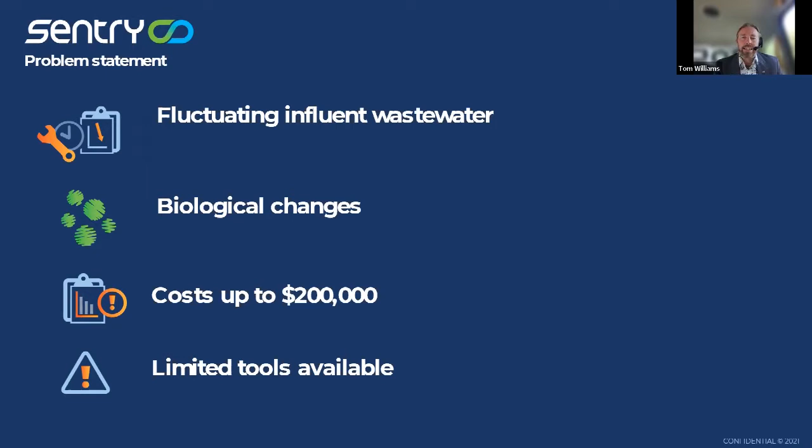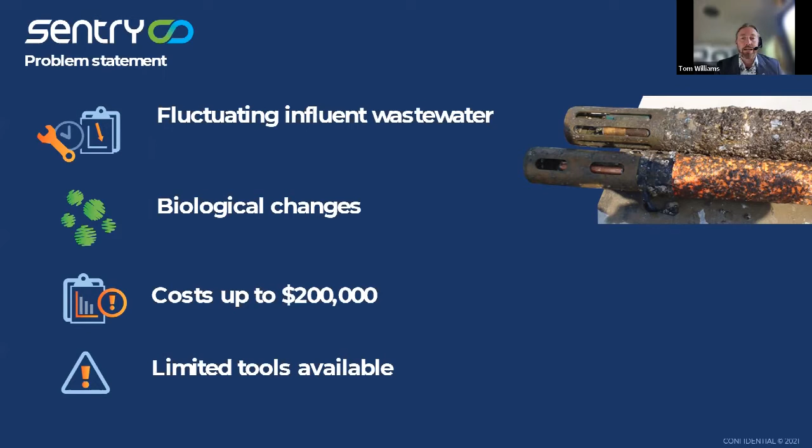So we had a problem statement. We all know this, we're all wastewater guys. You have fluctuating influent wastewater, you have the biological changes coming in, you never know what you're going to get coming down the pipe, and you need to know what's going on. If you're anything like me, you've seen probes covered in crap, which is no surprise - we're putting these probes in the crap, literally. But this is no good for our information, especially if this is an optical probe. Any optical probe that looks like this is not giving you a true reading. And the amount of time you're spending going out checking and maintaining these probes, you know they're not giving you accurate information.

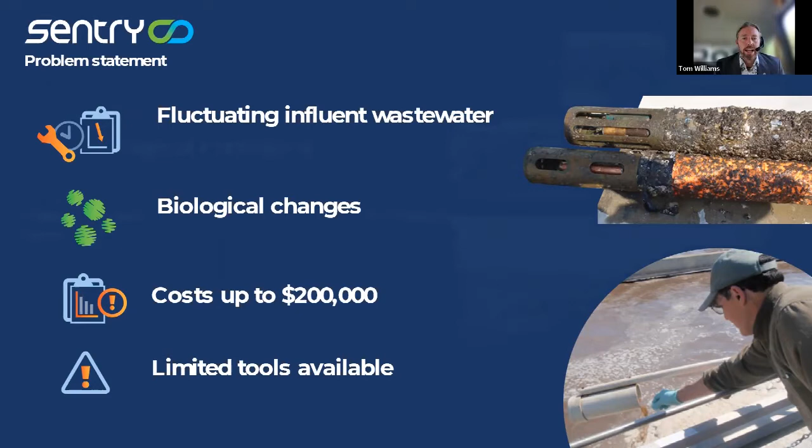So the very clever Dr. Patrick Kiely came up with a wonderful idea, and this was SENTRY. As we move forward - oh, there we go - that's what it looks like.

What's the tech? So this is what it is. Here on the right we have a probe, and on the left we have the box that this is connected to. In this box there is all kinds of communications. It can plug into your SCADA system, it can connect to your Ethernet, it also has a port for a phone card, a SIM card that can connect directly to a cloud.

On the end of that wire is this probe, and we have an anode and a cathode on either side of this probe, and in between we have a metal surface where our biology forms a biofilm across the surface. As that biofilm consumes carbon, it releases an electron, and we track that electron across the surface of that biofilm, and we come up with a signal - we call that MET, or carbon consumption rate - and that matches to the health of the biofilm.

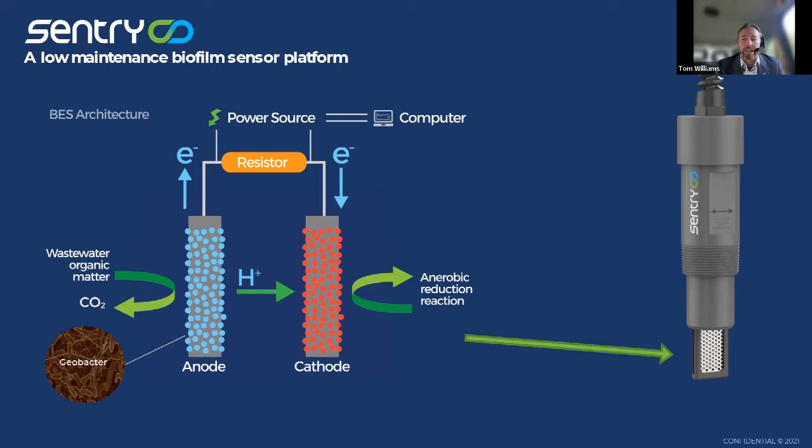And because we're encouraging a biofilm, we're encouraging deliberate fouling of this probe, and we're never getting any problems with the optical masking that you see with other probes.

As you can see, it's fairly easy to fit. Here on the left with a high flow, we've just got it strapped to a pole and dropped straight into the water, or maybe into an inlet tank to make sure it's fully submerged, or you can plumb it into a 1.5-inch line, or larger if need be, if you're looking at sludges or other types of liquors.

The box itself is NEMA 4X protected, and we're going backwards and forwards with the thing - it's NEMA 4X protected, plug and play, easy to use, and can connect to all your different communication devices. Now communications is always the big question with any probe, but we're happy to provide Modbus connection, Profibus, Wi-Fi, Ethernet, whichever suits you, and more likely 4 to 20 milliamp output into a SCADA system.

We usually provide 1 to 2 panels with 2 to 4 probes connected.

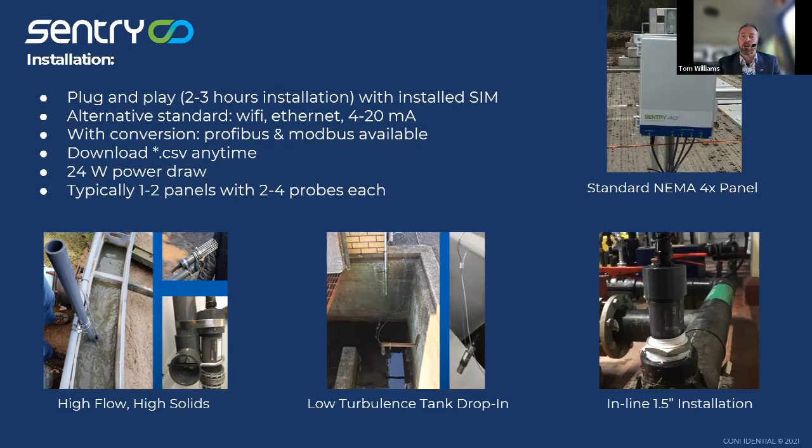Just keeping you on your toes, Tom. Just keeping them on my toes. Yeah, I'm liking this, it's good, it's like I never know what's going to come next. I'm going to be interested to see how the guys do this, introducing their setup.

So here are some of the locations that we're starting to use this probe, because a probe is only as good as the data it provides. As we say, with the optical setups, you can never rely on that data, but that data has to be useful, not just a random number generator.

So we started by looking at the inlet works with a primary clarifier to understand what's coming into a plant. And then we moved down the train, whether it be an aeration system, an anaerobic digester, whether it's some biological removal, phosphorus or nitrogen, or even we can go up the collection system into the network to try and judge maybe what industrial waste is coming down the pipe before you receive it.

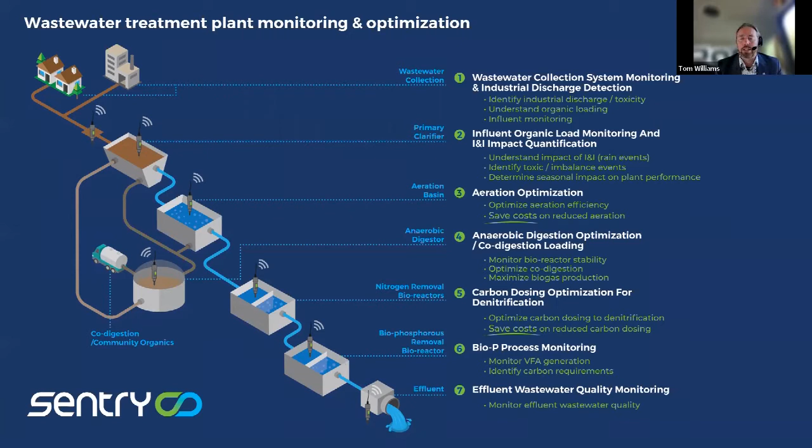And then the last point is the effluent, of course, and we want to see the best water quality we can. But really what we're trying to understand from our connections with you, and as you'll understand from the short introductions we're going to hear from the guys talking today, is what can we use this data for? When you know what's coming in, that's invaluable information. But how can you optimize treatment further down the line accordingly? How can you use that data?

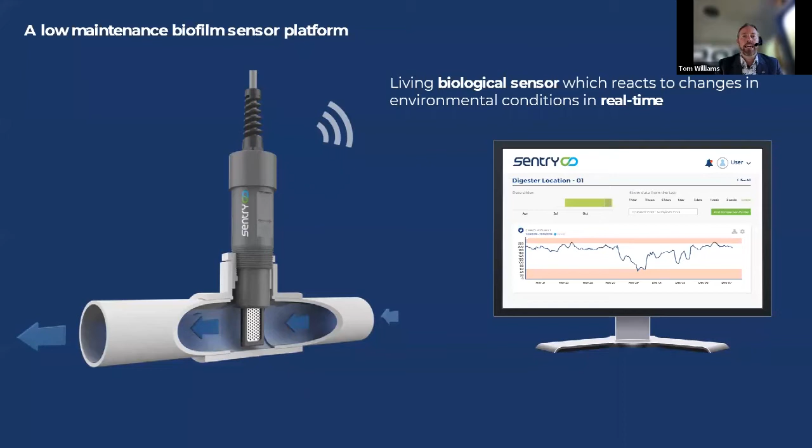And to help with that, we upload it onto our online platform where you can scan over time and compare different probes, and you have that instantaneous set of information for what's coming into your plant.

So far, in the last 3 years, we have managed to expand all across the world, and here's some of the locations where we have installations.

Across the United States, which many of you will be preparing for WEFTEC in the next couple of weeks, we have a number of installations. And of course, our global HQ is this tiny little island just in the middle here, Prince Edward Island in Eastern Canada. So it's a beautiful location to visit. Please come and see us, and hopefully we'll see you at WEFTEC.

Okay, so now we're going to look at applying it to plant optimization, and we're going to talk to some of our customers that we've been working with this year, and we're going to ask them to give a very brief and short introduction to what they were doing with the probe. And we have a couple of slides from them.

Most of the time, SENTRY is applied to these particular challenges: detecting organic loading and toxic shock at the inlet is where we're talking about, feed forward control, and generating pattern data on what's going on with the treatment works to help give that feed forward prediction to what's going on. However, these guys are going to tell you what they wanted to do and where they are.

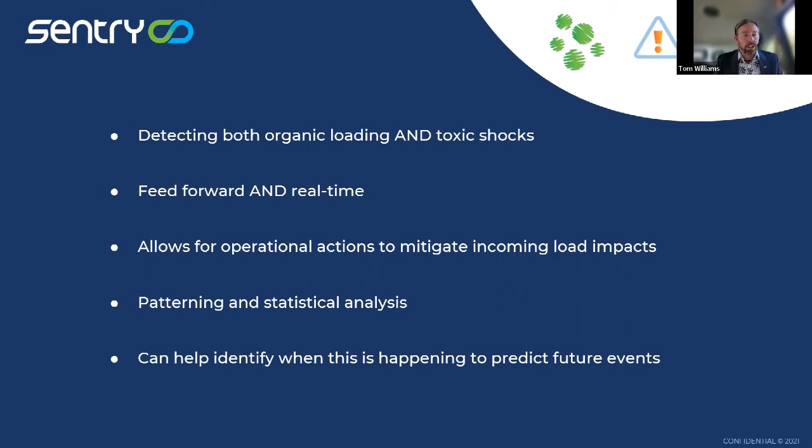These case studies, we're going to start with Roberto, who's going to tell us a little bit about what he wanted to do in Milan. These are case studies that we're currently developing. As you'll appreciate, we're just at the end of summer with these projects, and we're going to be working these up into larger, more detailed case studies and taking these further afield in the coming months. So we're very excited with where we've got to so far. And with that, I think we're going to hand over to Roberto.

Give me one sec, that's not the order that I put the slides in. Or we can take this time to pull up the poll first. Oh yeah, oh, that's a great idea. Put the poll up, I will share the screen for you. Oh, well, there you go, Roberto has got his slides ready. Perfect, alright, there you go.

Excellent, so we've got a little poll question to keep you all interested. And what we want to know from you guys is, what are you interested in optimizing? And what is the focus for your facility? Please select more than one, I believe that is available for you. But we want to know what you're trying to do and what your challenges are. Most of all, we want to know what your problems are.

Of course, panelists and myself, we don't get to vote in this, but please do click on and vote. The poll will end in 10 seconds. Fabulous.

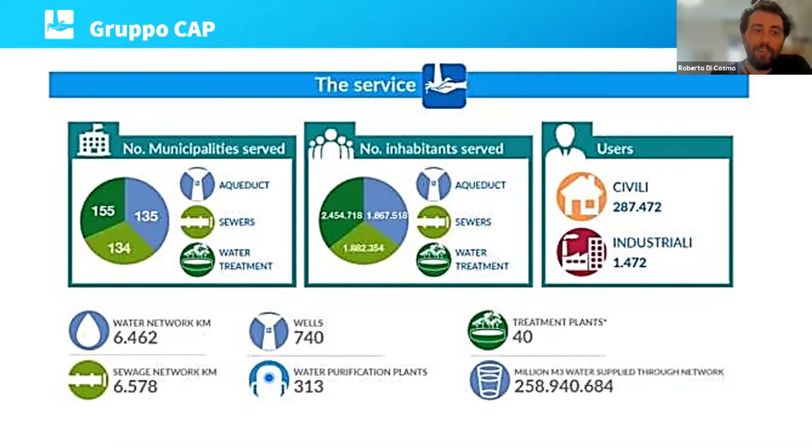We decided to start this implementation, hopefully just the first one, of the SENTRY sensors in one of our biggest plants, the second biggest one. It's the Pero wastewater treatment plant in the northern area of Milan. It serves 620,000 population equivalent, and we treat more or less 6,000 cubic meters per hour here.

As you can see, these are our usual common daily discharge limits and annual average that you can see around Europe. We chose this plant because sometimes we noticed illicit discharges occurring at the inlet of the plant, affecting, for example, odor emission and other issues in the last few years.

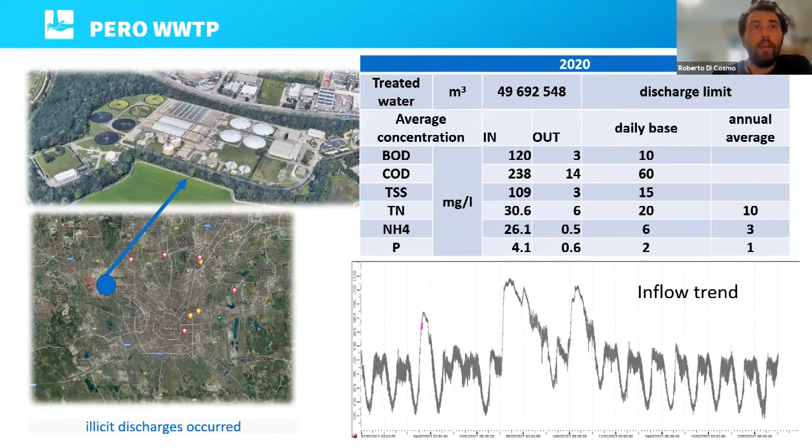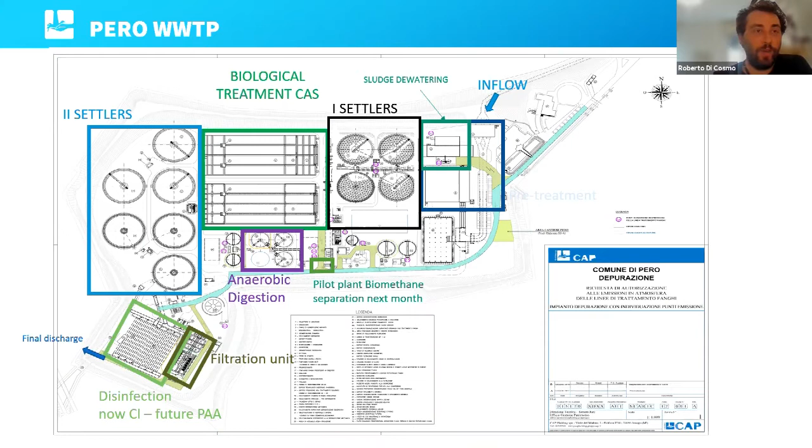This is a brief presentation. Of course, it's a conventional activated sludge plant. So we have gritting, primary settling, biological treatment with alternate cycle, secondary settling, filtration and disinfection with sodium hypochlorite, and in the next few months we'll move to peracetic acid.

As I told you, it's conventional activated sludge, but we decided to move to the alternate cycle in order to have complete automation of the biological system. We have our SCADA where we also bring the signal from the sensors, and we manage all this with our SCADA. In the next few months this will be in a control room in our new buildings in the center of Milan.

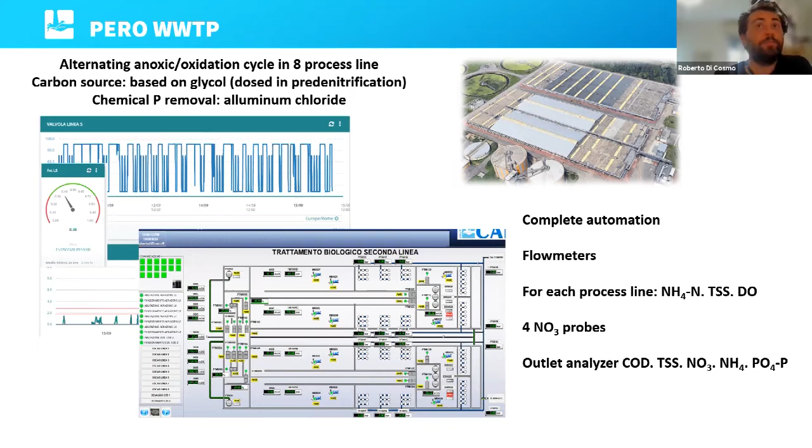So at the beginning, what did we expect from the SENTRY installation? We thought about that. The first thing is that we need to be advised when any illegal discharges with an inhibition effect occur. So what happens when something like this is found by the sensor?

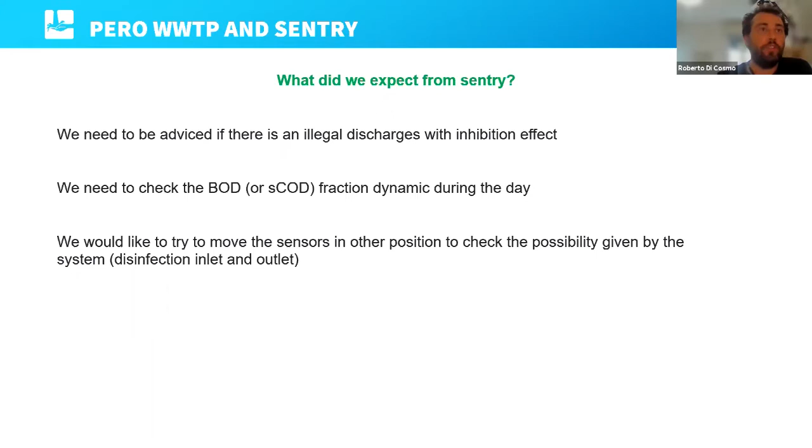Also, we need to check the BOD concentration, or maybe some fractionation of COD, in order to see the dynamic fluctuation during the day. Another thing is that we would like to try to move the sensor from a first position, where we check these two base things, to a secondary position at the disinfection inlet and outlet in order to see Escherichia coli concentration.

So at the beginning, we decided to put the two sensors at the inlet of the gritting and at the outlet of primary settling, in order to see the inhibition effect at the inlet and any possible effects of supernatant that comes back from the digester into the biological treatment pumping station.

So we installed the sensor there. We put the control panel near the biological treatment station, and we connected everything with a SIM card, as Tom told before, but also to our SCADA.

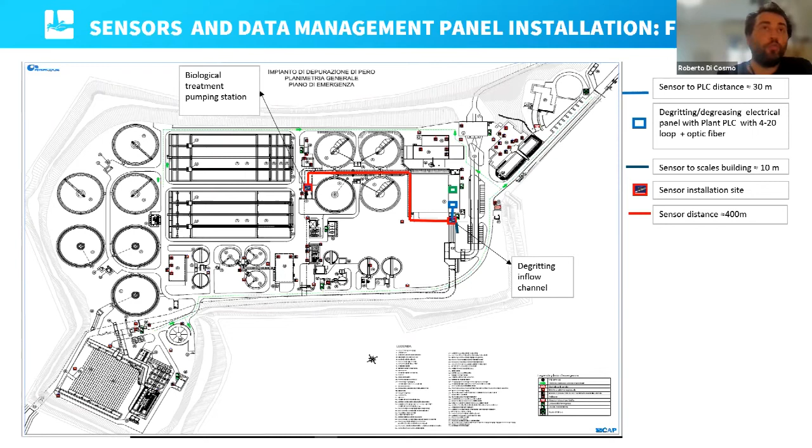Just a focus on the installation. Of course, we had to be careful in building this sort of structure to protect the sensor from the really high velocity of the flux in our channel. We had some basic issues with communication via SIM card, which we solved by changing the operator.

As I told you, we decided to check the data in our SCADA as well, in order to control it with other variables and correlate it with many other process variables that we have on site.

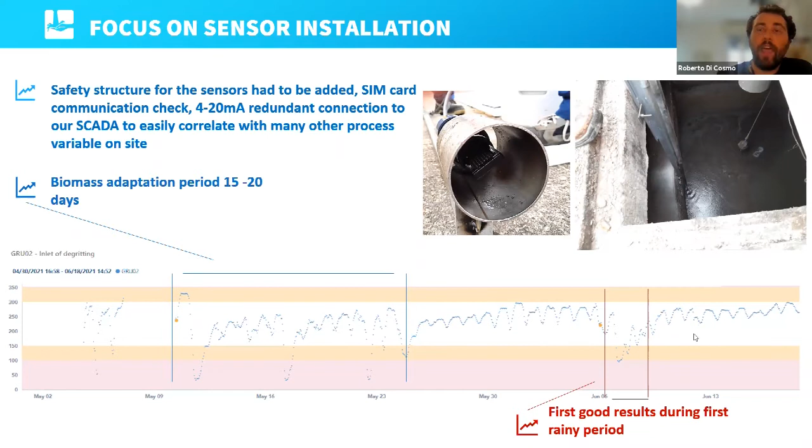As a first result, of course, we had an adaptation period of 15 to 20 days at the beginning. Then we saw the first good results, also during a rainy period, which in Italy doesn't happen so much in summer, but it does happen. And the system, of course, goes back to the normal value, as you can see here on the right side of this graph.

20 days ago, more or less, we did a 2-hour sampling campaign to see the dynamic fluctuation of pollutants - COD, total N, ammonia, phosphorus, and metals - and we noticed a correlation between microbiological activity and these parameters, with an R-squared higher than 0.85.

So we are thinking of doing another campaign now that we are not in summer, in order to see the possibility of replacing the influent sensor or analyzer with this kind of sensor in the future.

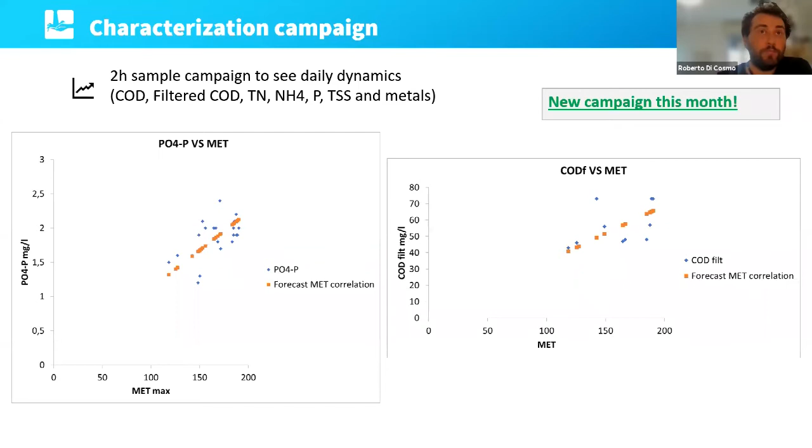So at the end, good for us that we did not find any illegal discharge in this first 5 months of operation of the system. But of course, the system has its own email alert when some thresholds are exceeded, on the dashboard and also in our SCADA. We noticed this interesting correlation with nutrients, and new ideas are coming on this.

We are waiting to move this both sensor in order to fix the effect of disinfection of disinfectant in our new peracetic acid dosing station. And maybe, let's see, I hope to see some correlation with Escherichia coli in the inlet and in the outlet. Of course, we need the help of SENTRY teams.

And what I can say is that in this 5 months working period, we have no problem at all with the biomass attached to the sensor, even with some material stuck in the sensor. It happens, it can be possible, but the sensor resists to any stress. So we are very happy.

We are proud of this first installation, and we are waiting to move these 2 sensors and continue this collaboration next year, I hope for many years. And that's all. Thank you, everybody.

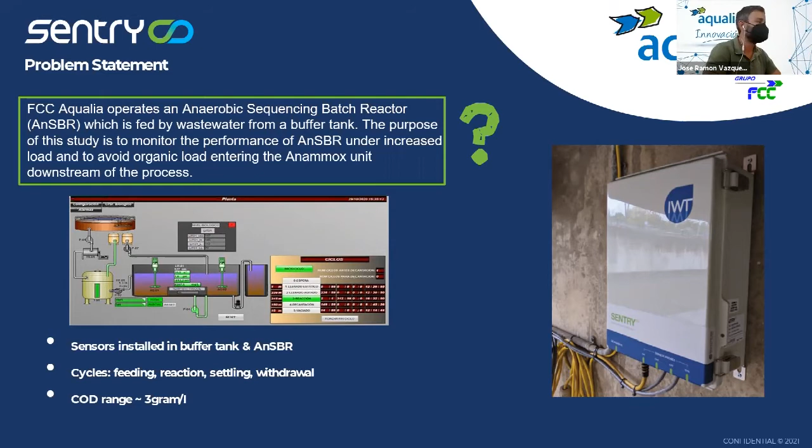So we had the chance to test the influent, and the good thing about the SENTRY probe is that we got real-time information about what was happening in the facility, because as Roberto was mentioning, sometimes even in the municipal sector, which is very stable, you get surprises and sometimes inhibitions. Imagine in the industrial sector where sometimes they don't have a clue about what's happening in the facility, and you have to treat the water. And sometimes you arrive there Monday morning and the biology is dead because no one knows why something happened and something arrived at the wastewater treatment plant.

So having the signal in real time, we had two probes, one at influent and one inside the anaerobic reactor. And what is marvelous with this real-time information is that you know that SBR works on a time basis.

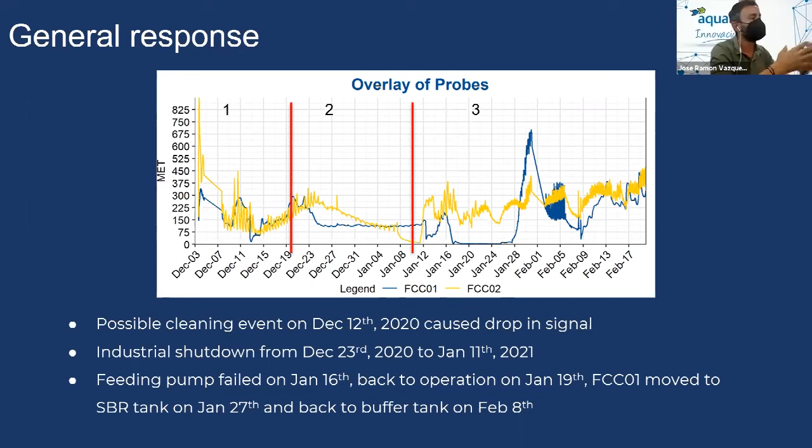The good thing about the SENTRY probe is that we had the chance to know when, inside the anaerobic reactor, the organic matter was already removed. That was wonderful because it allows us to optimize the time of the cycle, so you don't have to set it just on a time basis. You can use this real-time organic matter signal to match your needs, improve a lot, and meet the regulatory discharge limits. So it was very nice.

We also had another challenge: a very short amount of time to do our experiments. Here you can see how the signal evolves with the different phases of the anaerobic SBR reactor. You have an increase during feeding, and once you stop feeding, you reach a peak, then the organic matter is removed by the bacteria, so the signal drops.

When you see this difference and this plateau, it means the organic matter has been totally removed. With the SENTRY probe, we had the chance to know exactly when the organic matter was removed in the reactor. We also recognized some specific details related, for example, to these red regions.

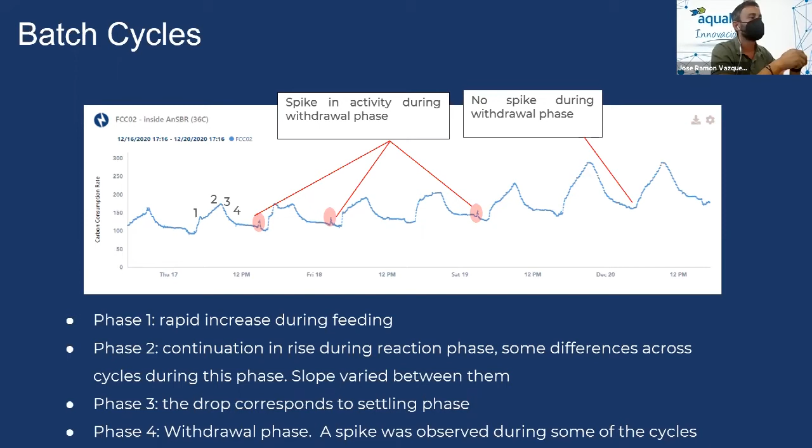That was something we had with an internal recirculation that was bringing some noise into our results. This helped during the pilot phase to adjust the detailed engineering needed for the full-scale plant. I must admit it brought us real-time information that we normally hadn't. It was fantastic for us.

We also noticed when something was rare or strange regarding the influent, because sometimes you get toxic loads, normally from cleaning agents added to the industrial wastewater. We had the chance to discuss with the client and see how to adjust the results. Here you can see a profile of the reactor when we didn't have this regular, I would say, swinging in the signal.

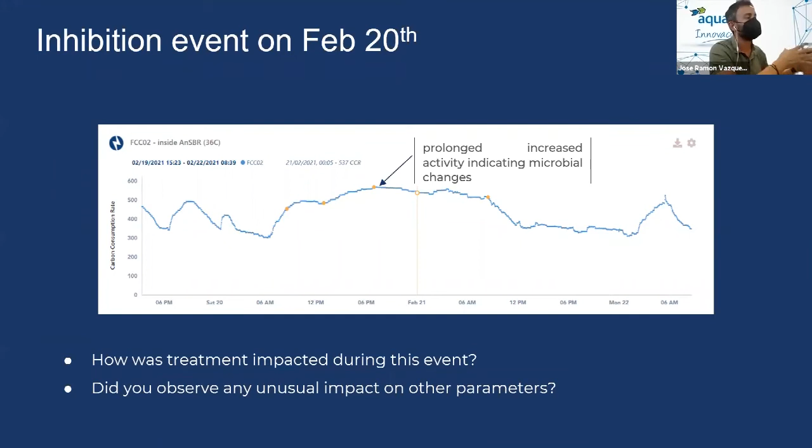This was mainly due to something happening before the reactor. So we had the chance, thanks to this real-time information, to talk to the client and ask them what was happening inside the facility. To summarize, we had somehow a high stress in terms of time for the piloting, and we could analyze carefully.

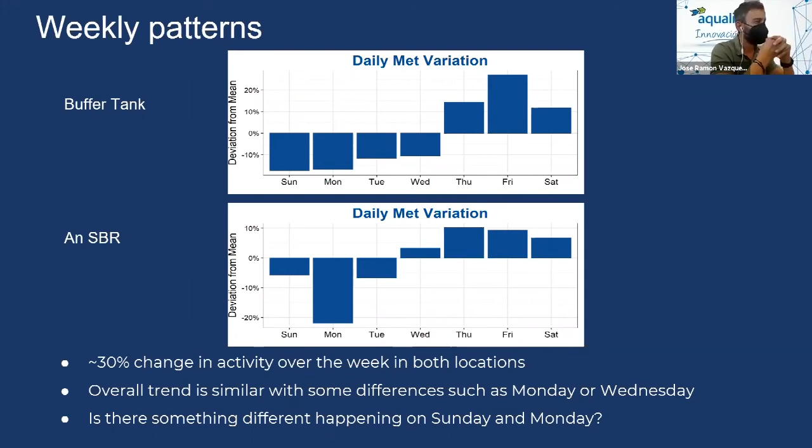For example, here we can see the daily variations and also the effect of the weekend. Normally during the weekend they perform the cleaning inside the facility, then during the week you have a more regular operation. So all this variation, all this information was really crucial for us to build the detailed engineering project for the client.

So having this real-time information for technologies which are known but still need some innovation, and these digital tools, brings important assets to really jump into the market, convince new customers, and help us make accurate detailed engineering and gain information on what's happening inside the biology—especially crucial when talking about slow-growing microorganisms such as anaerobic microorganisms.

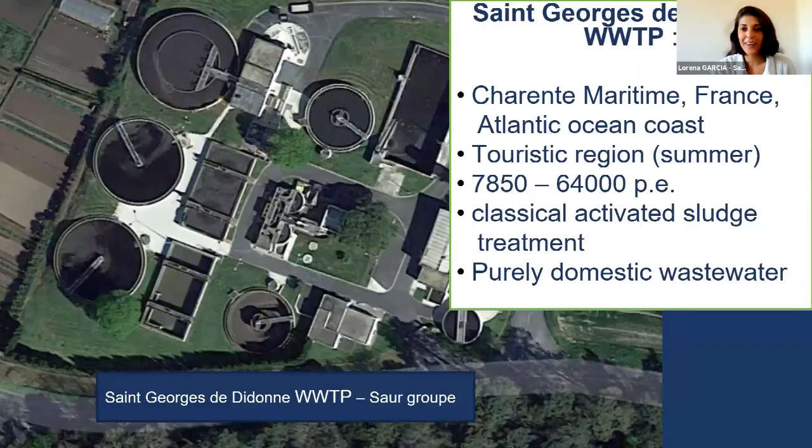Can I have the next slide? We had 2 probes installed, one in the inlet right after the pre-treatment screening, sand and oil removal, and the second one in the outlet. As I said before, this is purely domestic. We also have a COD-BOD ratio that's pretty much always 2.5, and BOD-TKN mostly at 4.2. So nothing weird going on.

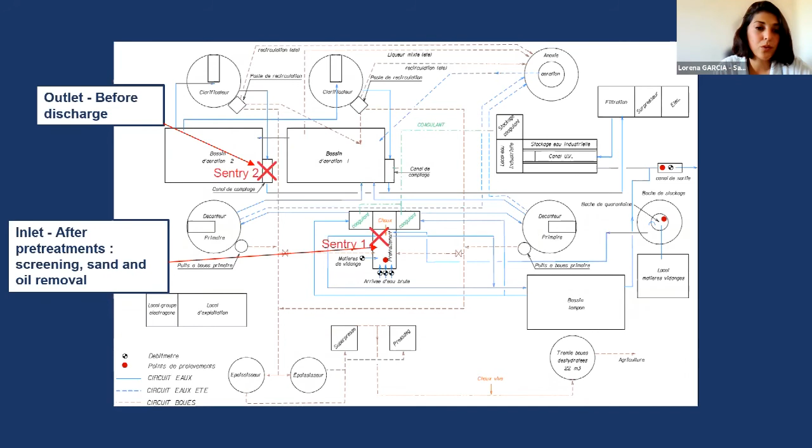So what we were looking for was to know if there was any activity, especially from illicit discharges going on, and also we could appreciate for all the time the probe was installed how the charges will vary depending on the season.

We also installed an optic probe right next to it, and the reading was awful - we couldn't get anything stable. And actually, with the SENTRY, for the past 6 months we had no noise visible in either the entry or the outlet of the wastewater treatment plant, so that I think is great. Mostly, we had a lot of sludge in the inlet due to recirculation, and it didn't affect at all the reading of the probe.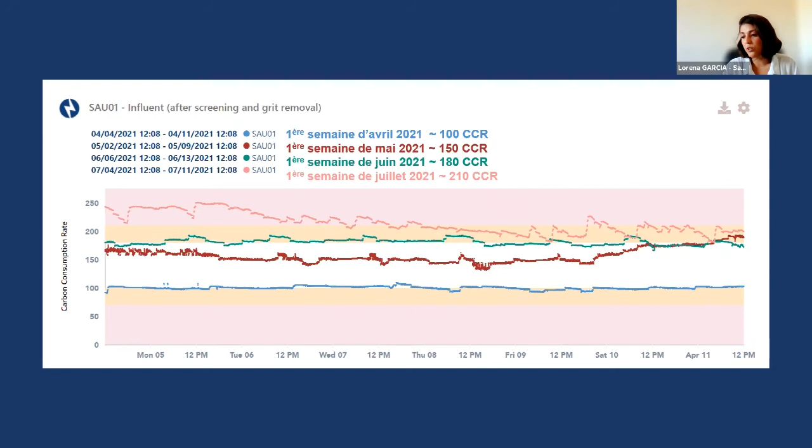Regarding what SAUR wants to do with this technology - this is just to compare some different technologies that would help us trace either illicit discharges or toxicity in the influent, mostly, well not most, only in wastewater treatment plants.

But also in the future, one of the objectives is - now we have some process of aeration regulation based on either the ammonium and nitrate concentrations in the aeration basins, and other ones based on redox. I don't know if that's okay in English. That's absolutely right, Lorena, that's fantastic. So the idea is to test with this technology to see if we can even improve those aeration systems, which cost highly, as Jose said before me.

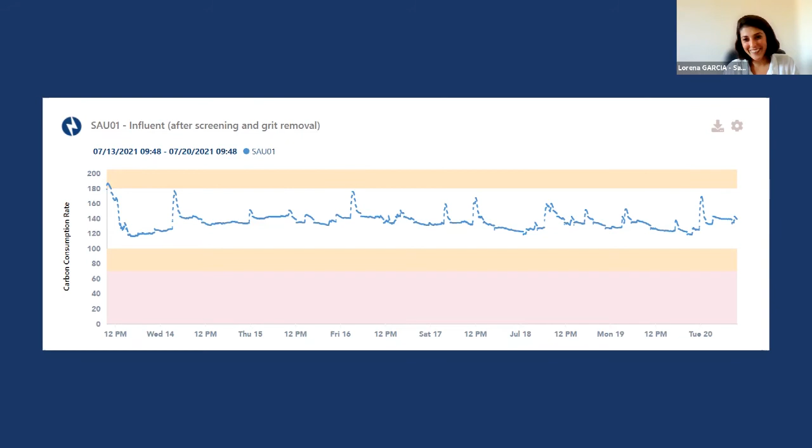So yes, we hope to continue the work with SENTRY. Fabulous, thank you Lorena, that's much appreciated.

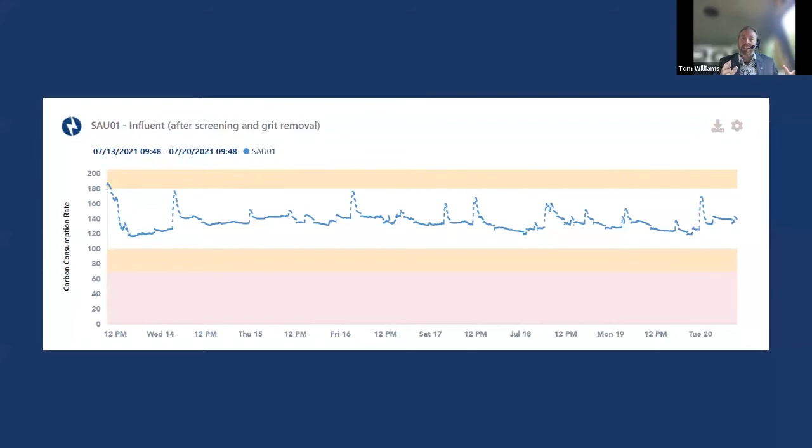We deliberately chose some very contrasting and different types of case studies here. We have Roberta, which is a big city with optimization challenges around the size of a big city municipal. We have Jose, with industrial challenges of very difficult and complex water. And Lorena, with a very interesting small town tourist location that has a large increase of dry weather and population during the summer months. Each of those should hopefully match up to individual challenges that some of our audience are coming across, and we hope to do a deeper dive with each of the people here at a later date. But first off, is there any questions from the audience before we finish up with how to get one for my facility?

That should be the number one question. Yes, of course, that's always the number one question. Well, it seems all quiet on the western front, but...

This number one question is, how do I get one for my facility? If we move on to the next slide, there'll be a whole list of representatives in your area, either reaching out to myself or John Grant, who's also on the call, or Alex Webb for North America.